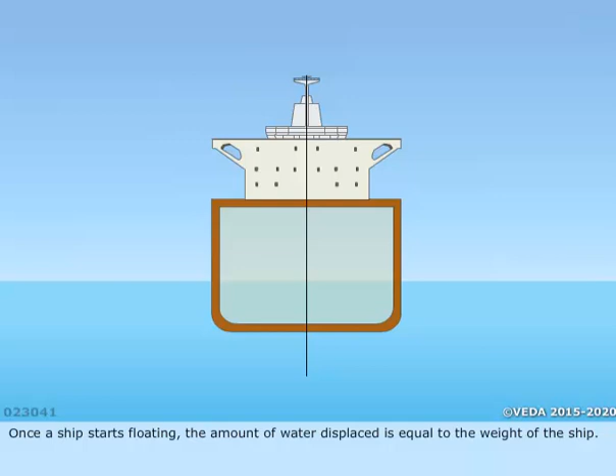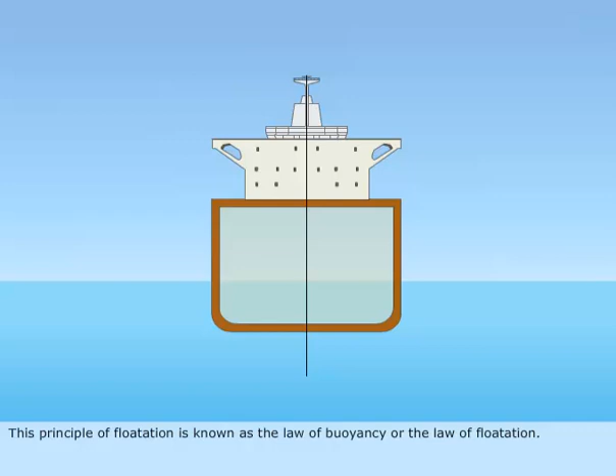Once a ship starts floating, the amount of water displaced is equal to the weight of the ship. This principle of flotation is known as the law of buoyancy, or the law of flotation. According to this law, a body is acted upon by an upward force when it is completely or partially submerged in a fluid. This upward force is equal in magnitude to the volume of fluid displaced by the floating body.

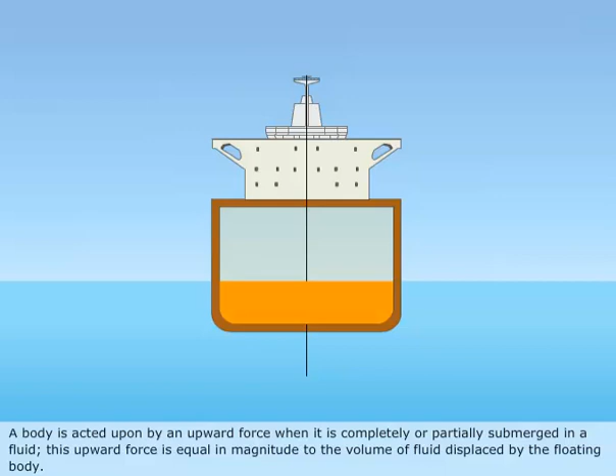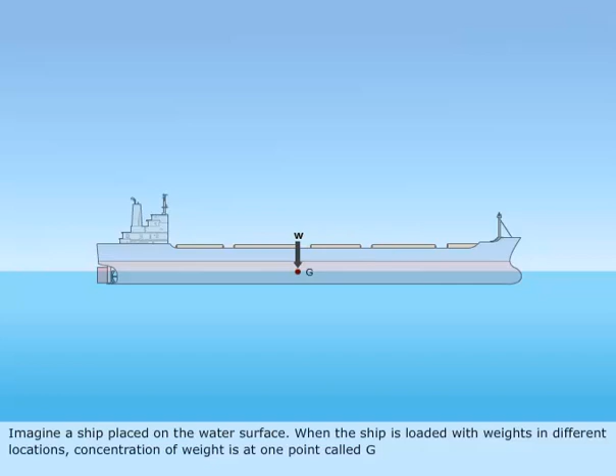Imagine a ship placed on the water surface. When the ship is loaded with weights in different locations, concentration of weight is at one point called G. The force of gravity acts vertically downwards through this point, and is called the center of gravity of a ship. This force is equal to the weight of the ship.

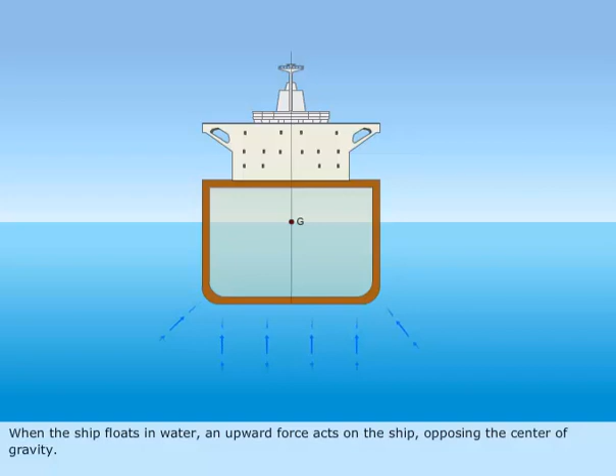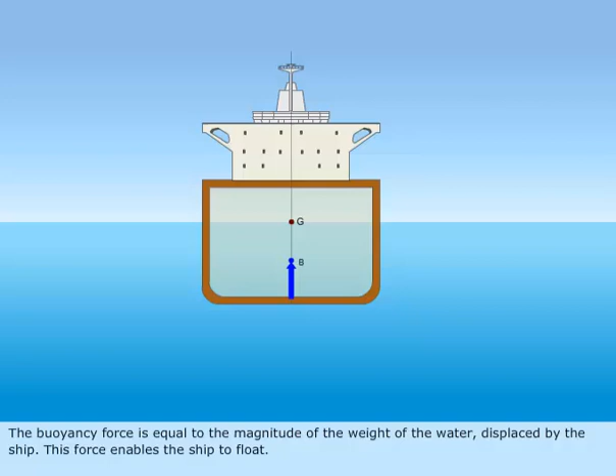When the ship floats in water, an upward force acts on the ship, opposing the center of gravity. This force is called the buoyancy force. It is produced by the water around the ship. The buoyancy force is equal to the magnitude of the weight of the water displaced by the ship. This enables the ship to float. Buoyancy B is always at the geometric center of the underwater volume.

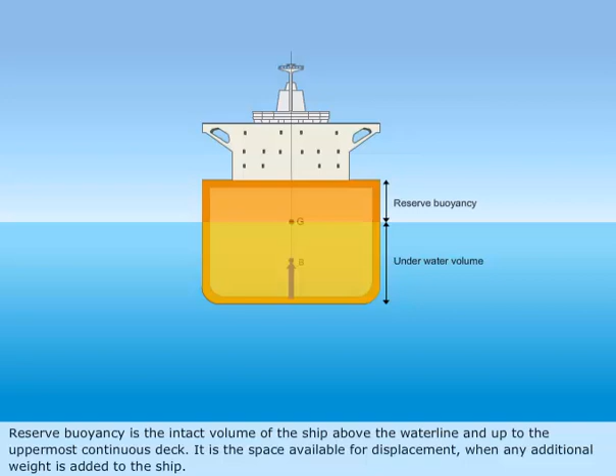Reserve buoyancy is the intact volume of the ship above the waterline and up to the uppermost continuous deck. It is the space available for displacement when any additional weight is added to the ship. Reserve buoyancy is expressed as a volume in cubic meter or cubic feet.

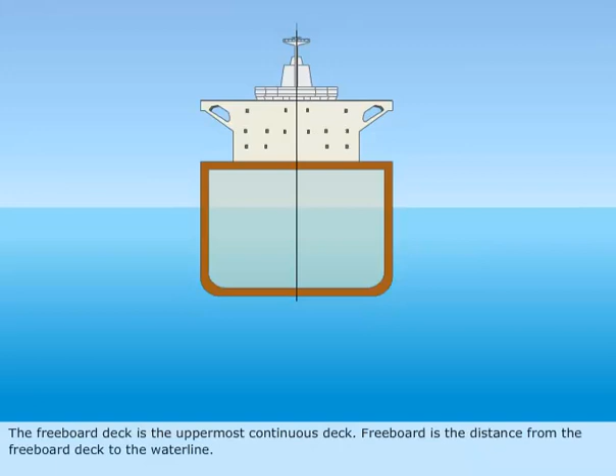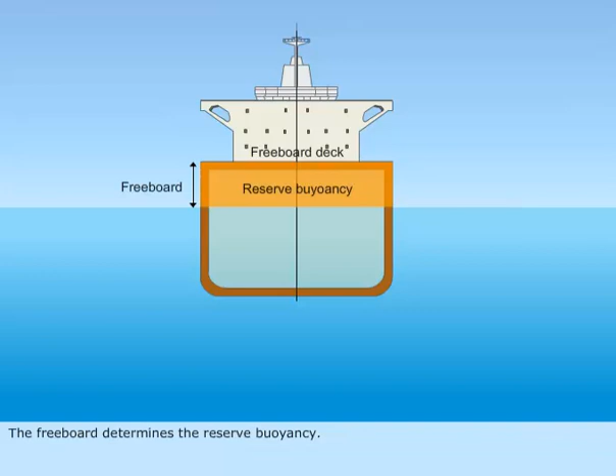The freeboard deck is the uppermost continuous deck. Freeboard is the distance from the freeboard deck to the waterline. The freeboard determines the reserve buoyancy. If a ship has large freeboard, it is said to have large reserve buoyancy.

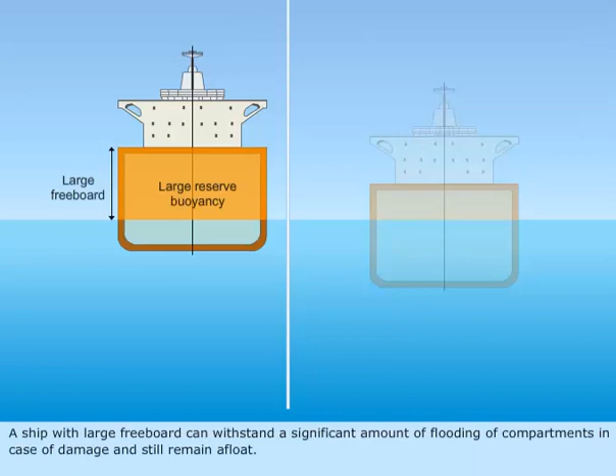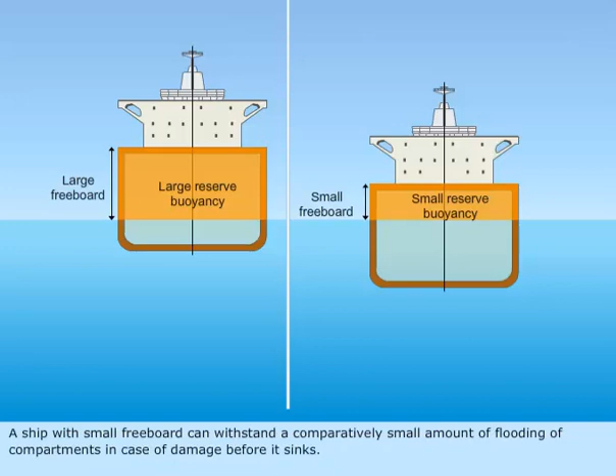A ship with large freeboard can withstand a significant amount of flooding of compartments in case of damage and still remain afloat. A ship with small freeboard can withstand a comparatively small amount of flooding of compartments in case of damage before it sinks.

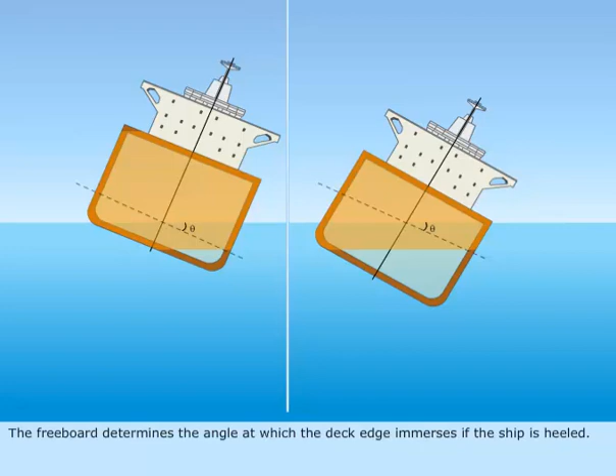The freeboard determines the angle at which the deck edge immerses if the ship is heeled. The deck edge of the vessel with a large freeboard will immerse at a relatively large angle of heel. The deck edge of the vessel with a small freeboard will immerse at a relatively small angle of heel.

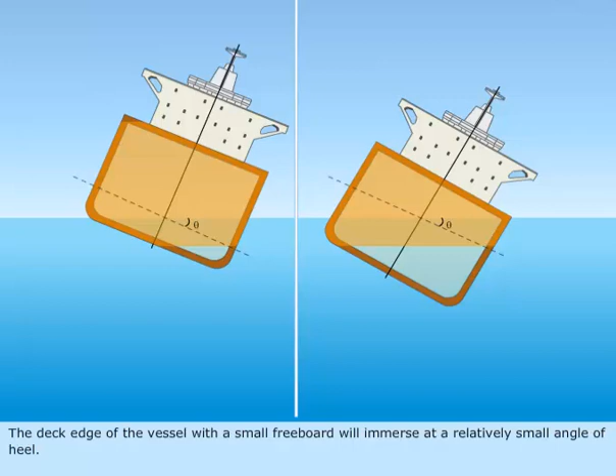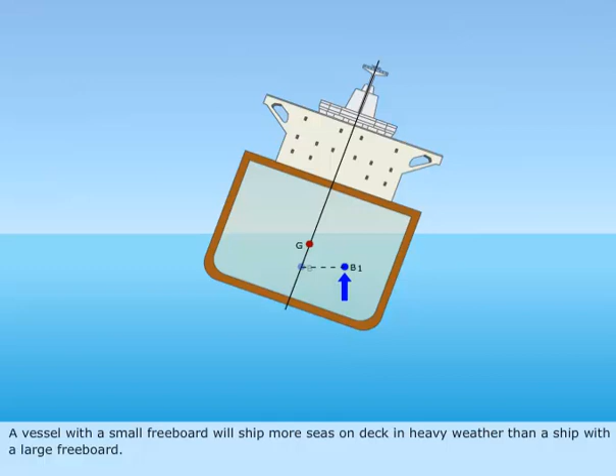A vessel with a small freeboard will ship more seas on deck in heavy weather than a ship with a large freeboard. This endangers personnel, deck cargo, and deck fittings, such as hatchways.

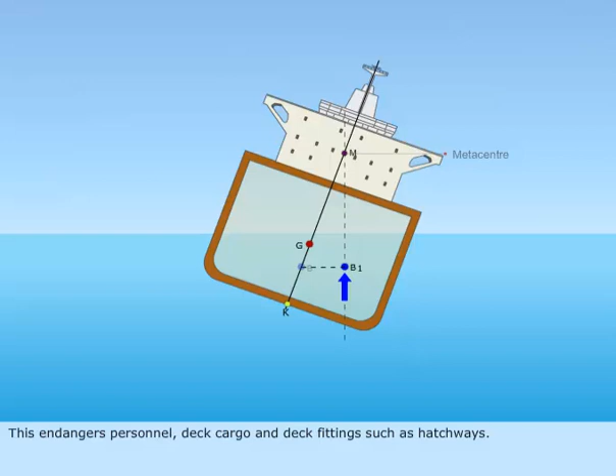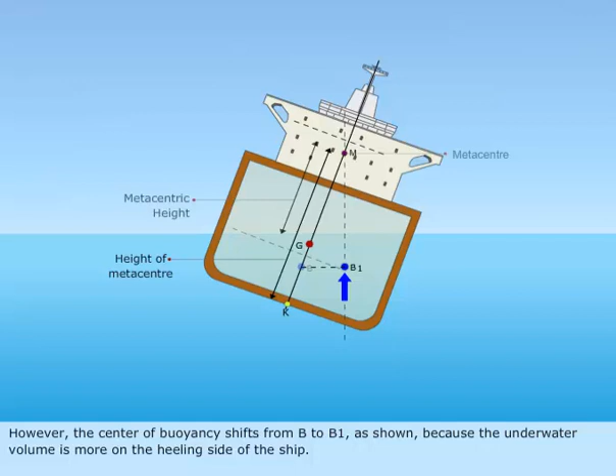When the ship tilts to one side, the center of gravity remains the same. However, the center of buoyancy shifts from B to B1, as shown, because the underwater volume is more on the heeling side of the ship. This buoyancy force acts upwards through the point B1.

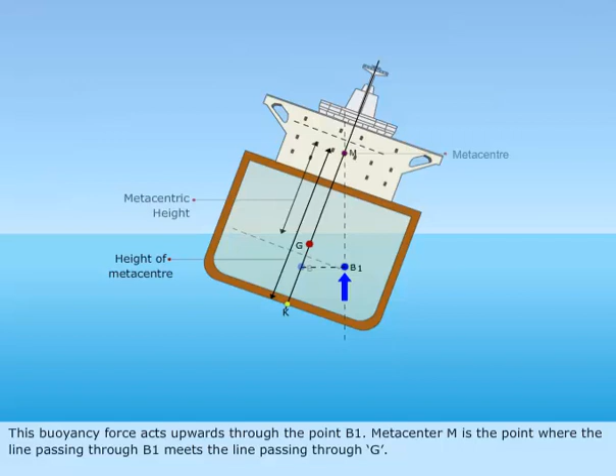Metacenter M is the point where the line passing through B1 meets the line passing through G. Metacentric height is the distance from the center of gravity to the metacenter. The height of metacenter is the distance from the keel to the metacenter.